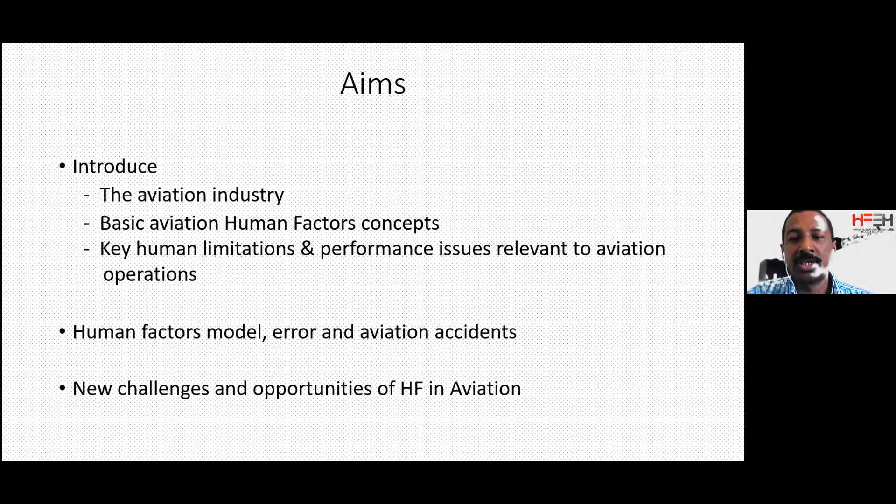This is the way I organize the talk: a little bit of history, what the aviation system is, introducing the aviation system in Malaysia, the rules and regulations. Then I'll look at human factors itself, the human model and error, and finally I'll end with some trends in human factors, challenges, and opportunities available, and finally some Q&A if you guys have questions.

First of all, we always have this confusion - what is aerospace and what is aeronautical? These two terms are used interchangeably.

Initially it was aerospace aeronautics, but now more universities like to use the word aerospace - one reason is that it sounds more glamorous. Technically, if you look at the chart, anything up to about 10 kilometers is where the air is denser, and we can fly normal aircraft using normal jet engines, which need air. But above that, the air becomes less dense, and you cannot use the same propulsion system - it becomes aerospace because you're venturing into space, like rockets and satellites. You need a different type of combustion and thrust system to bring the aircraft up. That's the main difference, other than the temperature changes and density and all that.

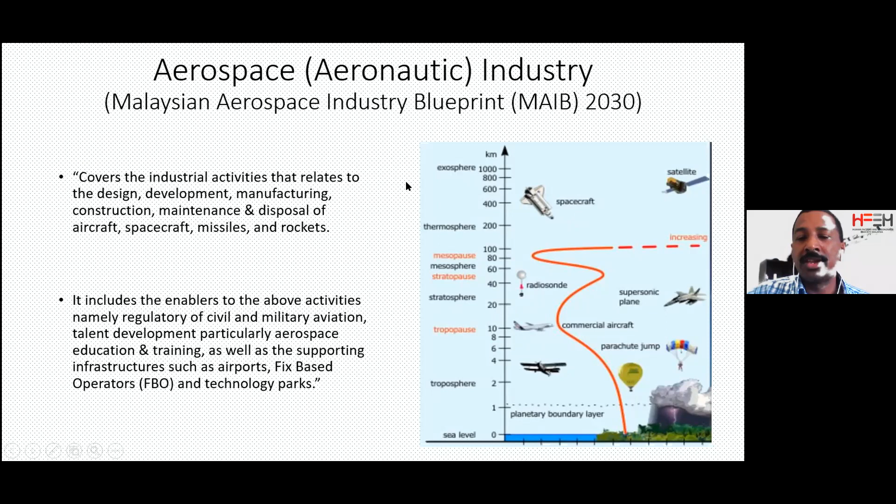A bit on the history of aviation - when people wanted to fly, obviously they looked at birds and tried to follow them. Like these guys, the Greeks and Romans, they tried to fly, but most of them eventually ended up dying, crashing, and dead.

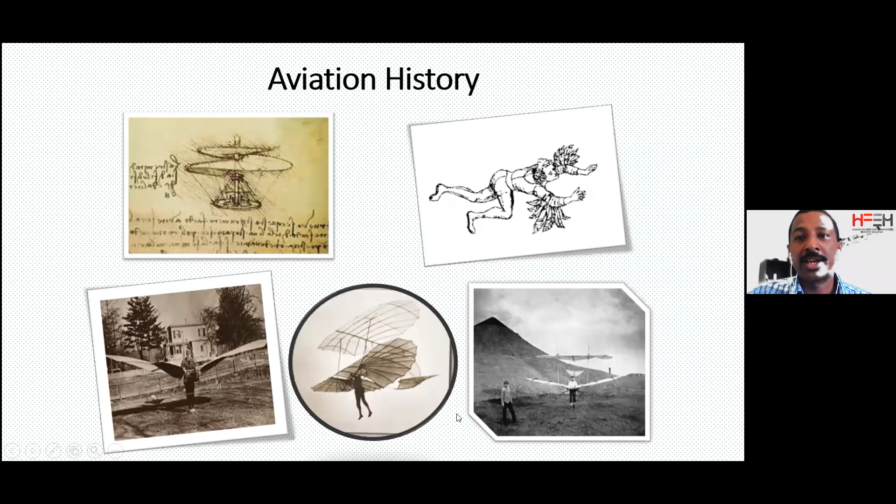So they come up with gliders and all sorts of things. One day, after a lot of trials, these two gentlemen, the Wright brothers, who actually had a bicycle shop, came out with a design and tried out this model, and finally they managed to fly, because they managed to fix a motor behind it with the propeller.

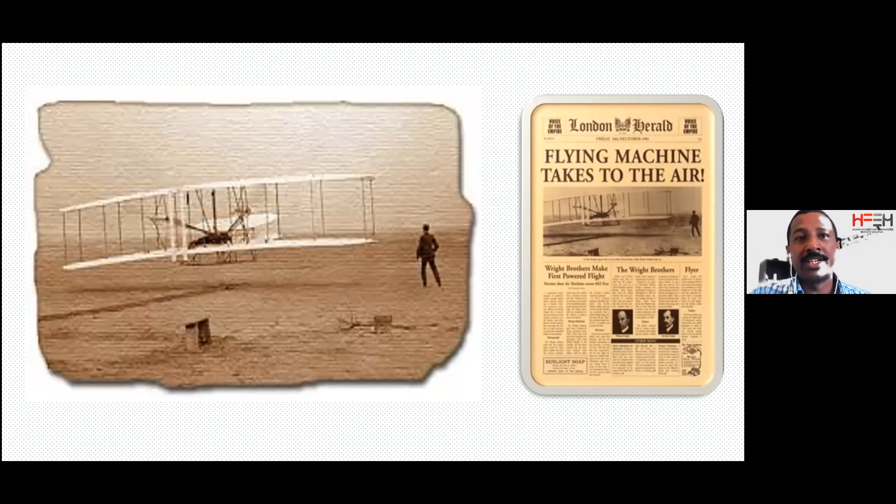So finally in December 1903, they launched the first flight, powered flight. It's called the powered flight. Before that, they were flying machines, but those were all like gliders and that sort. This one was the first powered flight.

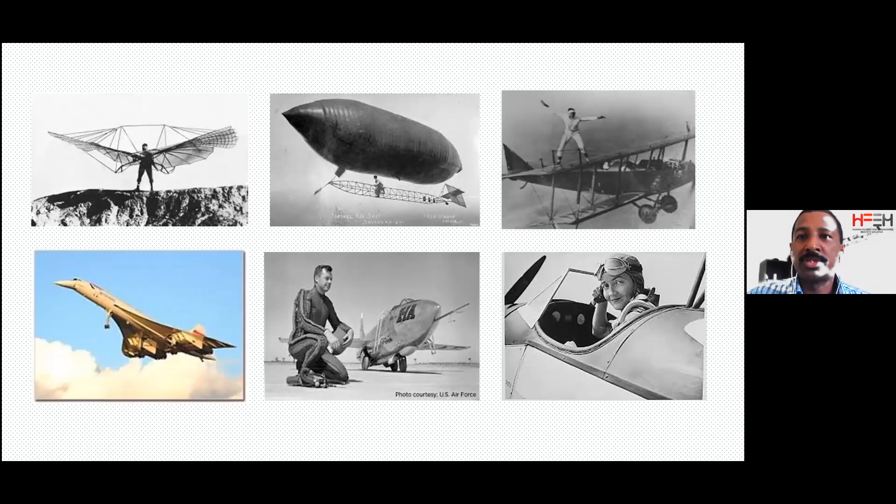From there on, aviation took off. They came out with balloons, and aircraft that can fly faster than the speed of sound. Then women start to get involved, and then you have this famous Concorde, which can fly between New York and London within 3 hours or so. So aviation progressed very fast.

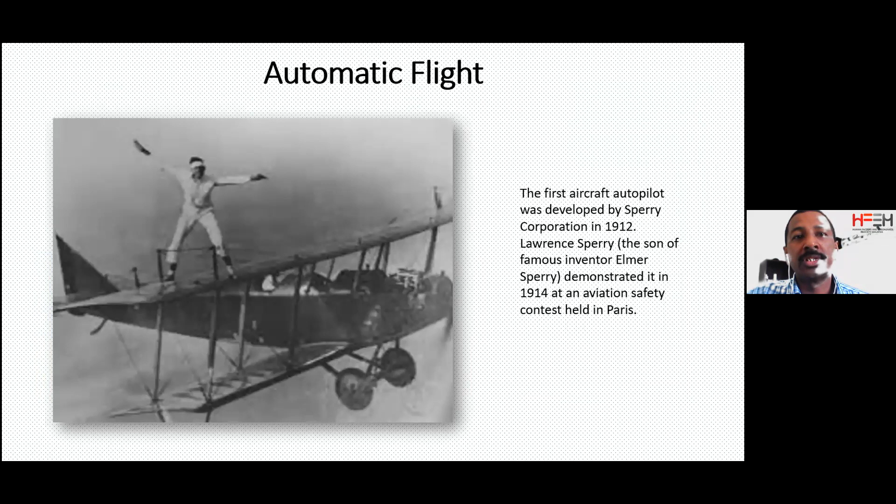They also started to design autopilots. This guy is trying to demonstrate that the aircraft is flying on its own. He climbs out, trying to demonstrate the new system. From there on, aviation took off even faster.

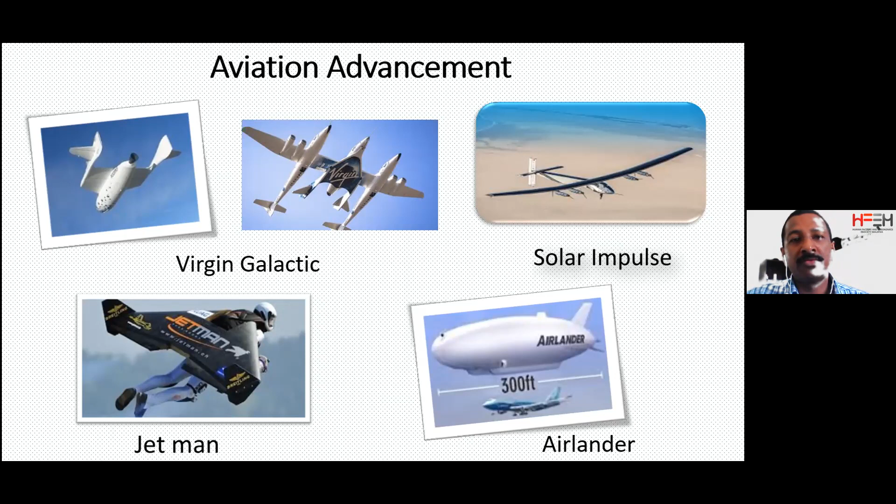For example, this is the one on the bottom left - he flies in Dubai alongside an A380. We have very advanced drones now, fighter jets, and also spacecraft.

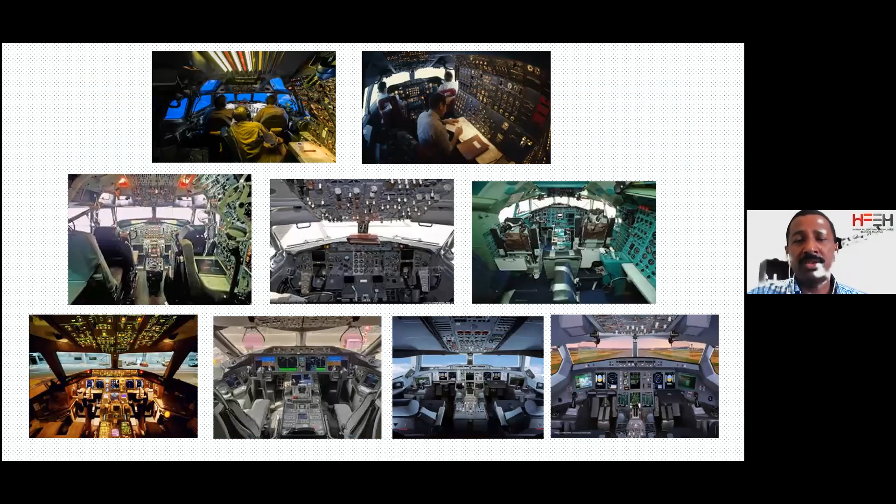So eventually in aviation, for example in the cockpit itself, the design of the cockpit went from 4-5 people in the cockpit, it starts to reduce, and then all this bottom row is all the advanced aircraft - 777, 787, 380, and then 350. So aviation has advanced a lot.

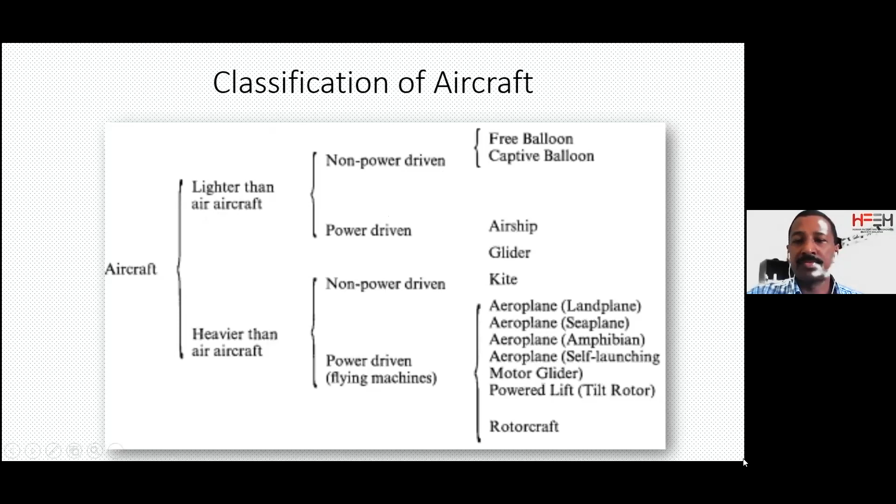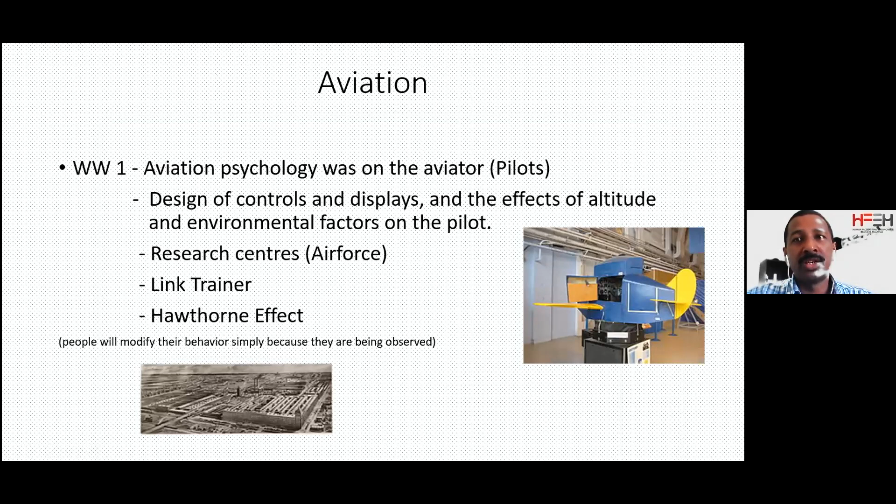Some of the earlier mistakes, the human factors - how it started was basically from psychology. A lot of this research was done during World War II, because they realized that even with the best trained pilots, accidents were still happening. So they started to study why these things happen.

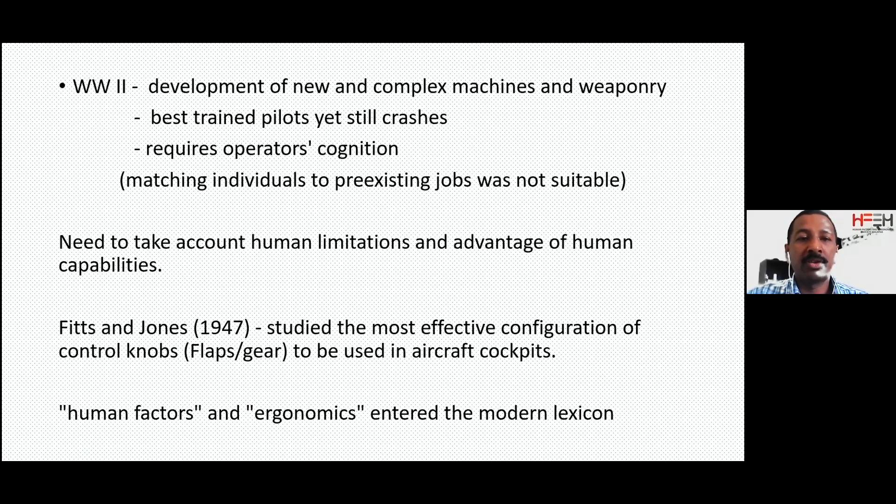One of the earliest studies was done by two gentlemen, Fitts and Jones, in 1947, on how to configure the knobs, the flaps and the gear in the aircraft cockpit. That's when the new term human factors and ergonomics started coming up.

Another example will be this helicopter - in Malaysia we call it Nuri. It's a Sikorsky aircraft that also crashed, because of the way the controls or the warning system were designed, the pilots could not see the location of the warning system. When it shows red, they don't realize there's a warning coming, so they continue and then they crash.

This is what I said about flap and gear design. When you're sitting in the aircraft near the wing, you can see this thing coming out when you're coming into land - that's called the flap. And then the gear is our normal landing gear.

So to avoid people making mistakes, they started to design the flap lever with a shape similar to a flap, so when you touch it, you know that you're touching the flap control. And on the gear lever, at the end of the handle, they put a shape like a gear, so when you touch it, you know it's the landing gear control. So you don't mix it up.

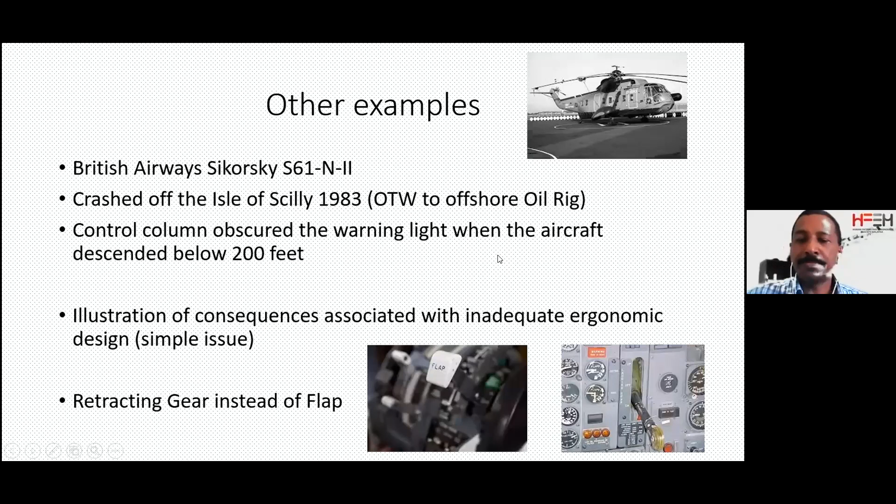Another one is this Apache aircraft - we don't have it in Malaysia, it's America and some other advanced countries. Very advanced aircraft, and the pilots use a helmet mounted head-up display. It's focused on only one eye, and they get a lot of information through that small piece of equipment. Because one eye is always focusing on that display, generally Apache pilots' eyes end up different sizes - one becomes smaller than the other. Of course, cockpit seat design is similar to a car, but the seat must be very comfortable for the pilots, so there's a lot of technology in the seat design.

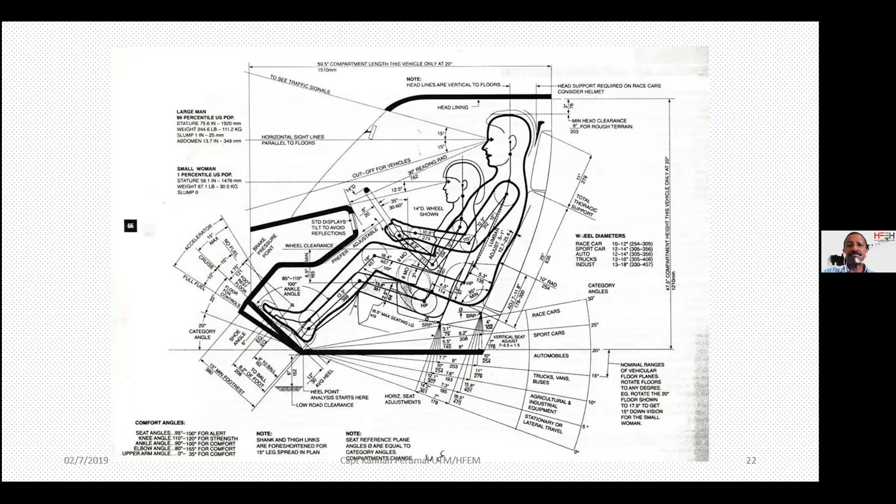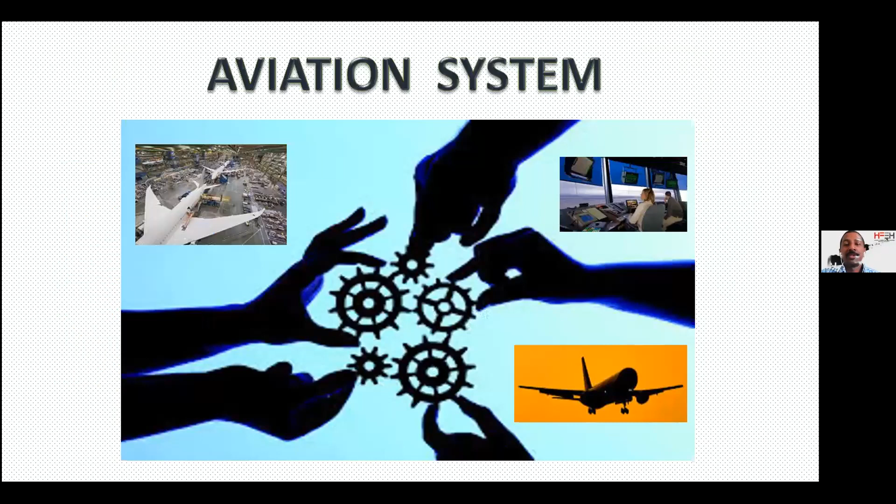Now the second part - I'm going to talk about the aviation system itself in Malaysia. Basically it consists of three main elements. One is the transportation system, the airlines and the industry itself. Then you have the customer - without customers, you don't need the industry. And then, of course, all these are regulated by the regulatory body, which in Malaysia is called the Civil Aviation Authority of Malaysia, CAAM.

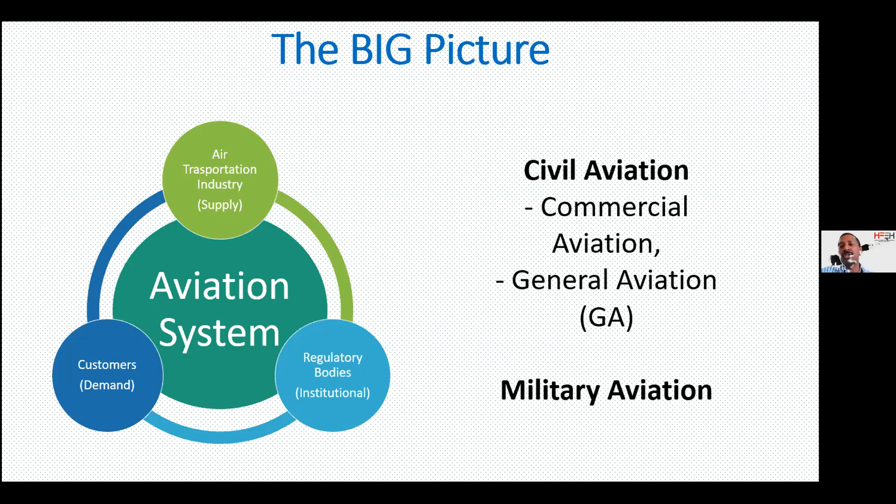Aviation can be divided into two: civil and military. Today we just talk about civil aviation. We have commercial aviation, and we also have general aviation. General aviation covers flying schools, small aircraft, business jets, and all that.

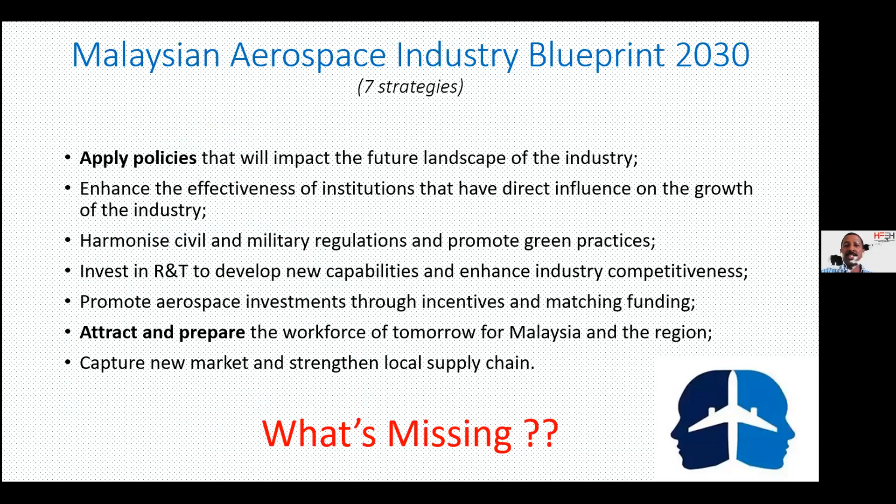In Malaysia, they came out with this aerospace blueprint with 7 strategies to increase the aviation industry in Malaysia, to attract, prepare, and all that. But there's something I realized that is missing in this blueprint - we'll talk about it in a while.

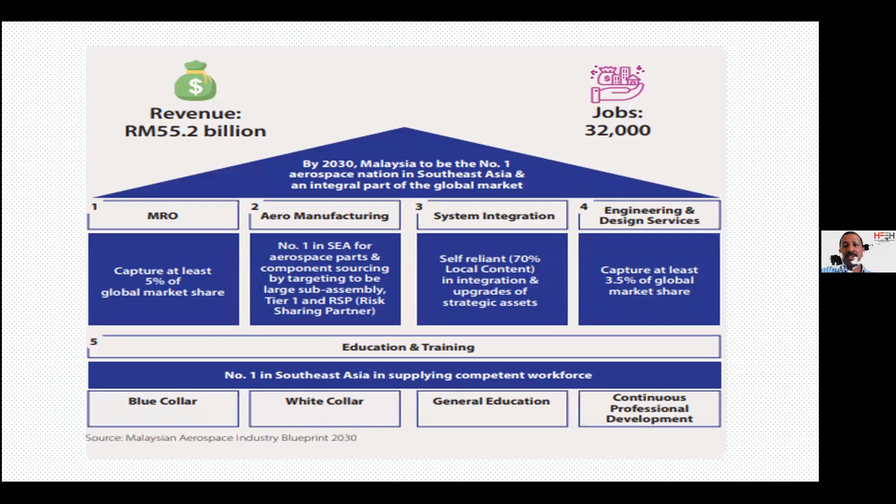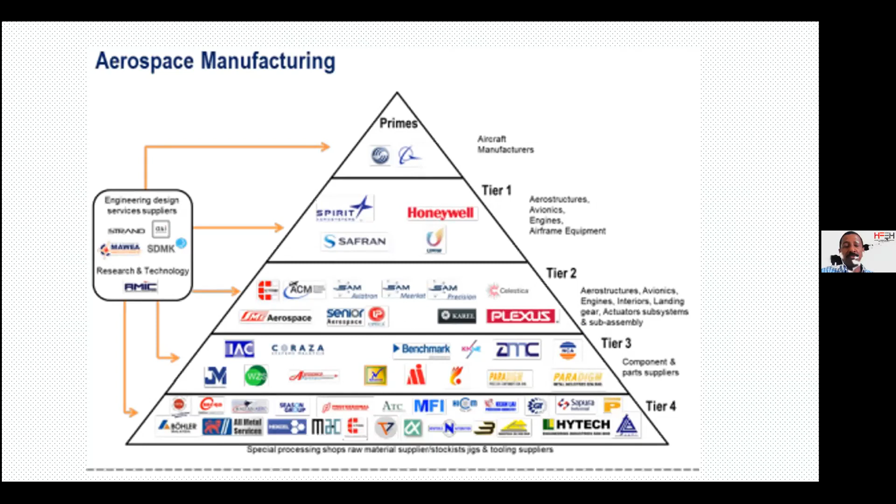So this blueprint covers how to increase jobs and revenue, divided into different parts. There's the aviation industry in Malaysia - first tier suppliers, big companies like Spirit AeroSystems, Honeywell, Safran, all the way down to Tier 4, which supplies small components in aviation manufacturing. We also have a few operators in Malaysia, like Malaysia Airlines, AirAsia, Firefly, MASwings, Malindo, plus smaller ones including the Air Force and Pos. The new company will be SKS Airways, supposed to start, but I think because of COVID, they delayed.

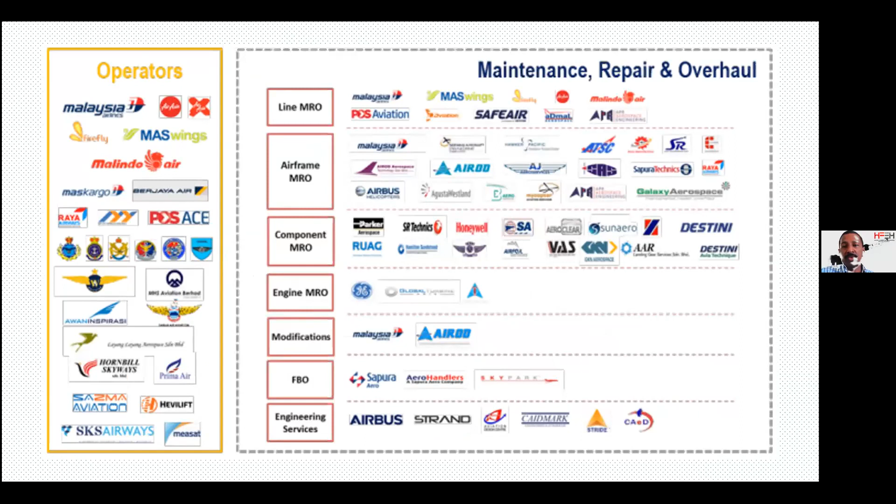And in many places in Malaysia, we have aircraft and aviation-related industries, manufacturing, flying schools, and all that. Obviously universities are involved too - all the academic institutions for training and education.

But again, as I said, something is missing - they only talk about the technical stuff. The human factor side, the economic side, nobody seems to be looking into that. So there's a gap there, and hopefully our group can do some work for them. In fact, this is one of the reasons we're having this talk, to open up the idea that there are opportunities inside this industry.

This industry is generally a very, very highly regulated industry. Everything you want to do needs approval, and it is controlled by the main body called the International Civil Aviation Organization, ICAO, which is the biggest regulator. It's supported by IATA, the International Air Transport Association, mainly for airline passenger services and all that.

In Malaysia, ICAO's role on a smaller scale is taken by the Civil Aviation Authority of Malaysia, CAAM. IATA, which takes care of passengers, lost baggage, and delayed flights - if you want to complain, you go to the Malaysian Aviation Commission.

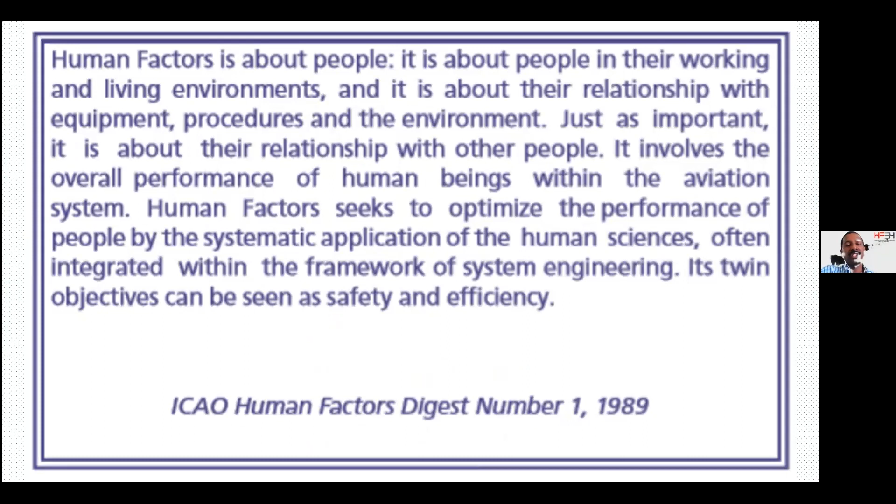So then again, what is human factors? ICAO has defined human factors as being about people, working with environment, and the relationship between equipment and environment. And it involves human. Right? The twin objective is safety and efficiency. That's end of the day, we do all this mainly because of safety. So in summary, we can say it's basically to reduce human error, increase productivity, enhance safety and comfort, with specific focus on interaction between human and other things of interest.

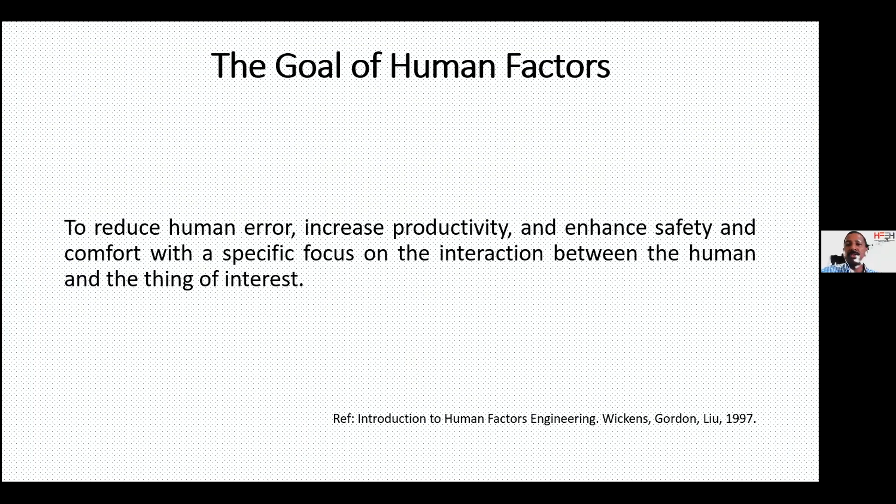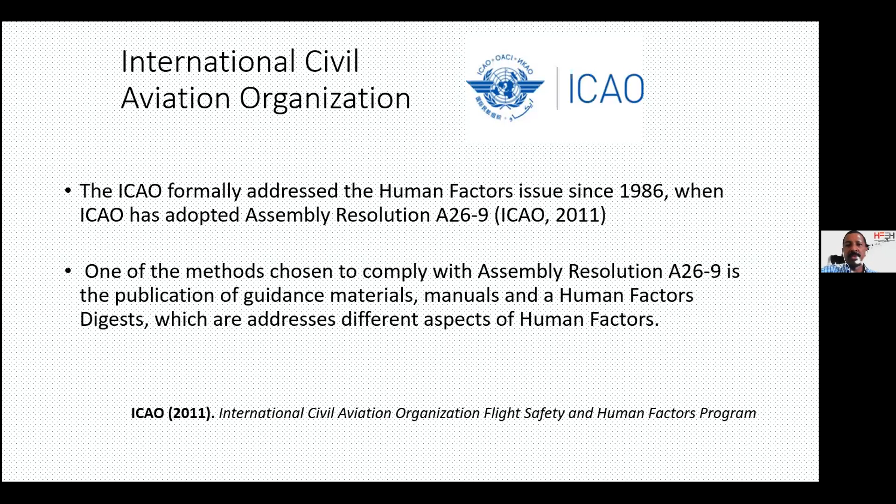ICAO has their own manuals. Through assemblies and meetings, they come out with different manuals. For example, they have human factors guideline for aircraft maintenance, management, organizations, and all that. There's also other human factors related documents. If you want to go about aviation, we can find about 16 documents. Probably now there's a bit more.

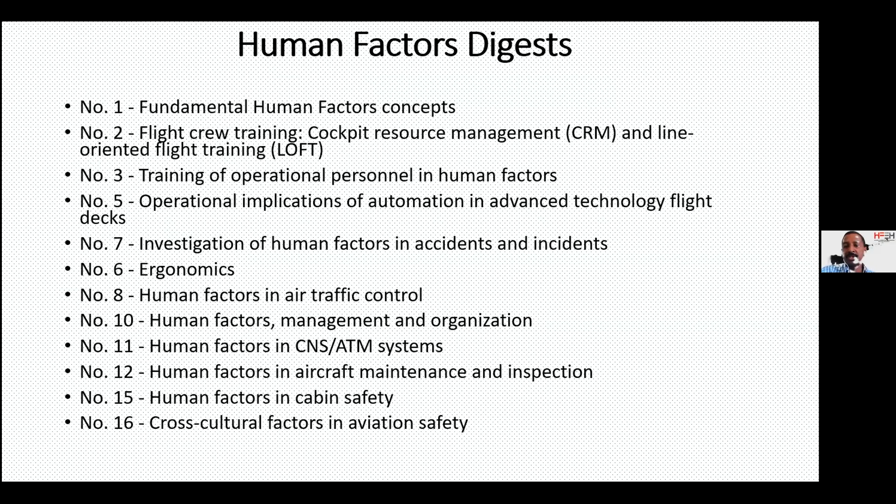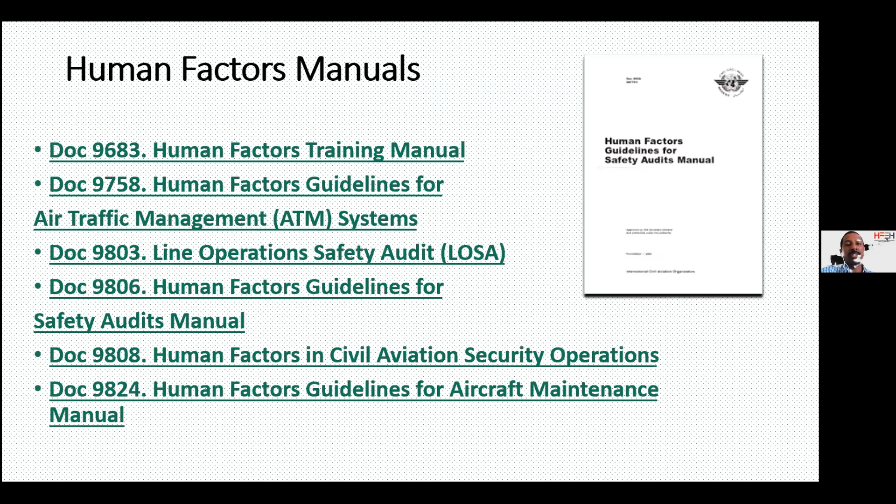They talk about air traffic control, maintenance, cabin safety, even culture, automation, crew resource management, and all the different documents. Some more manuals, documents, human factors training manual, and all that. Those interested can go and find these documents to gain more knowledge on this.

In Europe, they have another document called the CAP 719, Fundamentals of Human Factors Concepts. And as I said, IATA also becoming like ICAO and trying to do some business with this. They also run human factors courses. In fact, now online you can do all these courses in this process.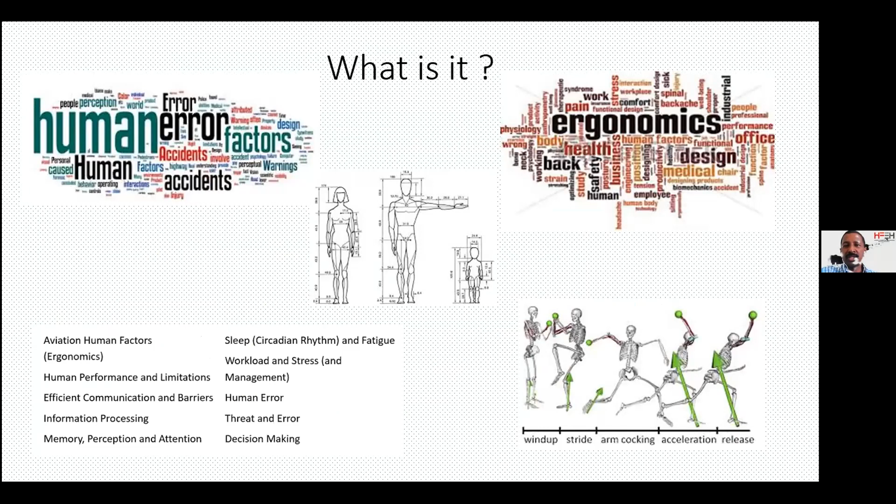When you talk about human factors, sometimes we mix it up with ergonomics. These two are always closely related. The topics we always look at are information processing, sleep, threat and error, decision making, and all that. One is static measurement, and we also look at dynamics. Again, concepts, communication, stress, workload. This is similar to other industries, but in aviation, we look at it in a bit more detail.

Under the ICAO, or in fact under the CAAM, we have a lot of other regulations or acts, the Civil Aviation Act, aircraft offences and all that. Although these are not directly involved with human factors, this is just for your knowledge. As I said, it's a highly regulated industry.

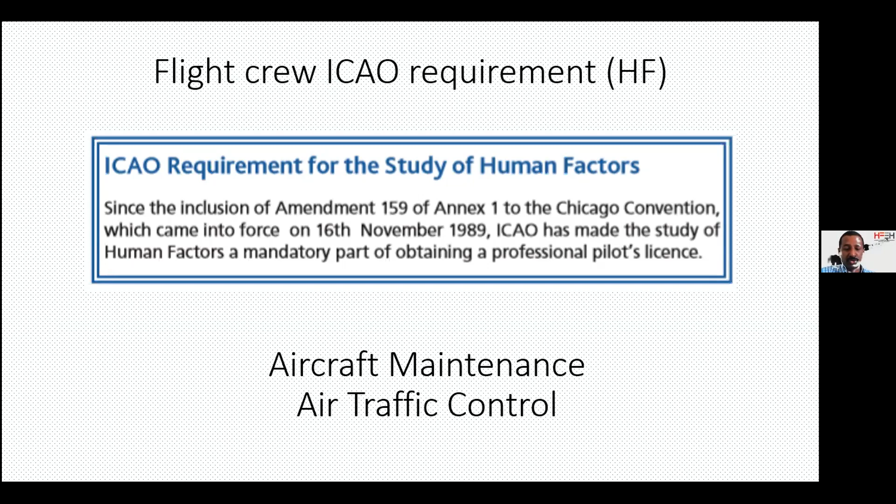One of the requirements is for pilots, for example, it's a requirement for us to pass human factors courses. We must pass it as part of our license. Similar to the maintenance engineers, aircraft maintenance engineers, we call them licensed aircraft maintenance engineers. They also need to take many subjects to pass it, and module 9 is one of the human factors modules. Similarly, the air traffic controllers must also pass this human factors module.

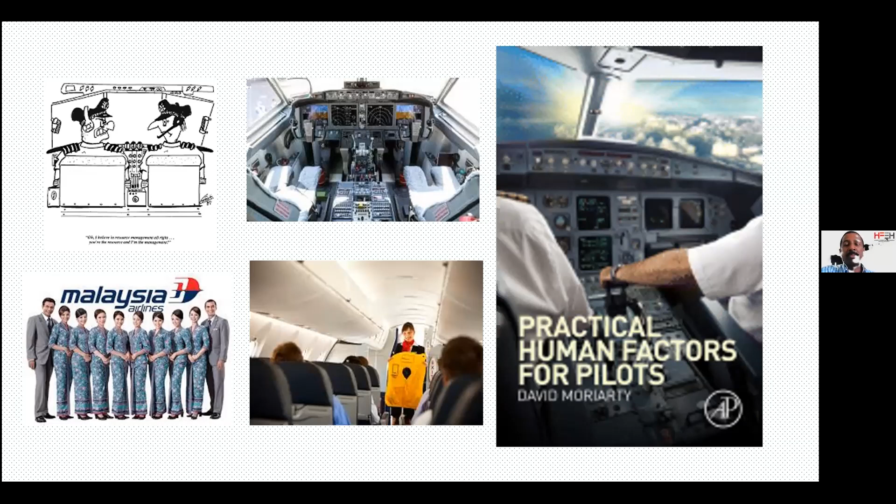As I said, there are mainly three segments in aviation. If you look at it, there are many more, but I will just talk about the three. One is flight operations, pilots, cabin crews, and then how they interact in the cockpit, how they work with the modern cockpit, a lot of technology. And in fact also the cabin crew, when they are dealing with the passengers, there's a lot of human factors involved even behind the scenes.

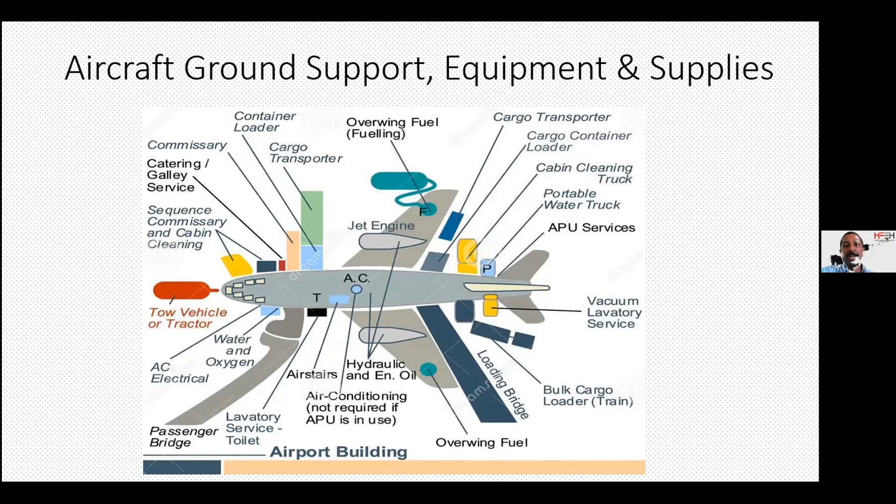This is another thing. When the aircraft is parked, you can look through the window next time you're at the airport. When the aircraft is parked, there's many equipments around it, so there's a lot of human factors involved. There are a lot of accidents that happen. This tow truck went and hit the aircraft. When they're supplying the catering, some accidents happen. When refueling the aircraft, sometimes there's a fuel spill. How do the safety procedures we need to follow work? There's a lot of things happening around the aircraft.

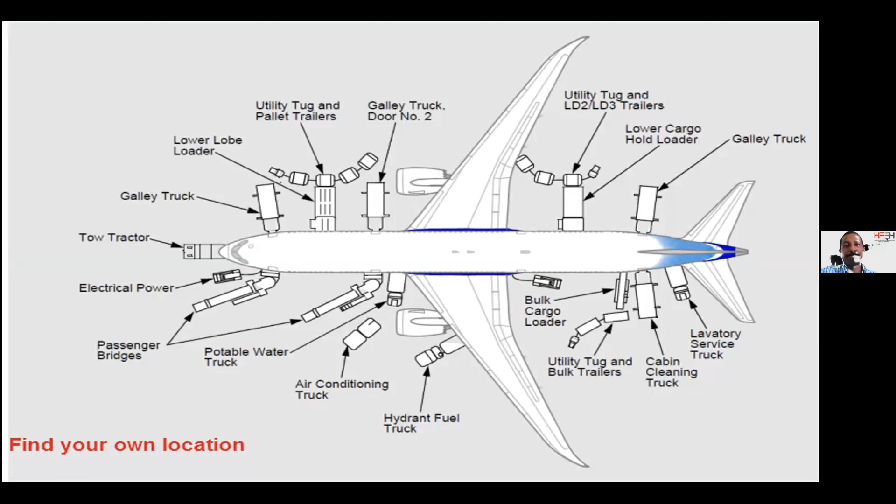How they load the cargo, and sometimes when they try to fix the aero bridge to the aircraft doors, there's also some accidents that happen. Sometimes the aircraft, when it's coming in to park, also hits the aero bridge. So there's a lot of human error mistakes that happen, and these are mainly human related errors.

Next one is aircraft maintenance. If you get an opportunity, maybe the human factors group can organize a trip to the aircraft hangars, the Malaysian airline hangars. Either we can go to Subang or KLIA, see how these aircrafts are maintained. These hangars work 24 hours, with different light conditions, daytime and night time.

There's a lot of accidents that happen. Generally, this accident happens early morning because of not enough sleep. People die in the hangar because they have been crushed by the flaps. When they're doing some tests, something falls down.

The aircraft wing here, they're doing the inspection of the wing. Also, some errors happen marshalling the aircraft. So aircraft maintenance also involves a lot of human factors issues.

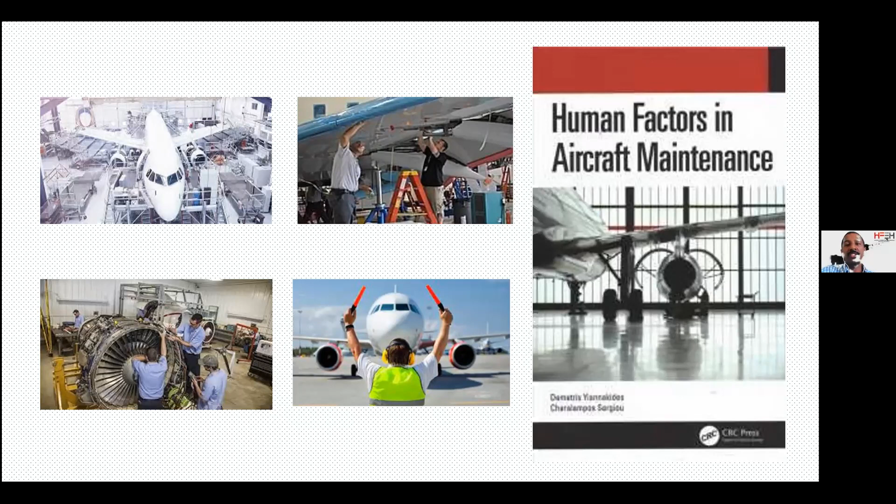As I said just now, the next segment will be air traffic control. This is another area that many people don't know about, which is very important in the aviation industry. These are the people who control the aircraft. They sit in the control tower, that's what most of us think, but they also sit in the air traffic control rooms.

Like in KLIA, we can also organize a trip. Of course, now we can't do it because of COVID. But this is how the working environment is - very, very busy. They're controlling a lot of aircrafts.

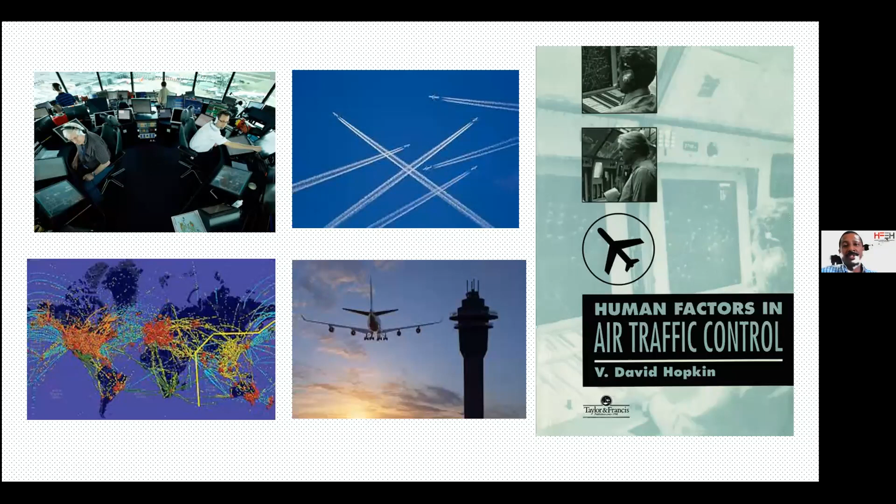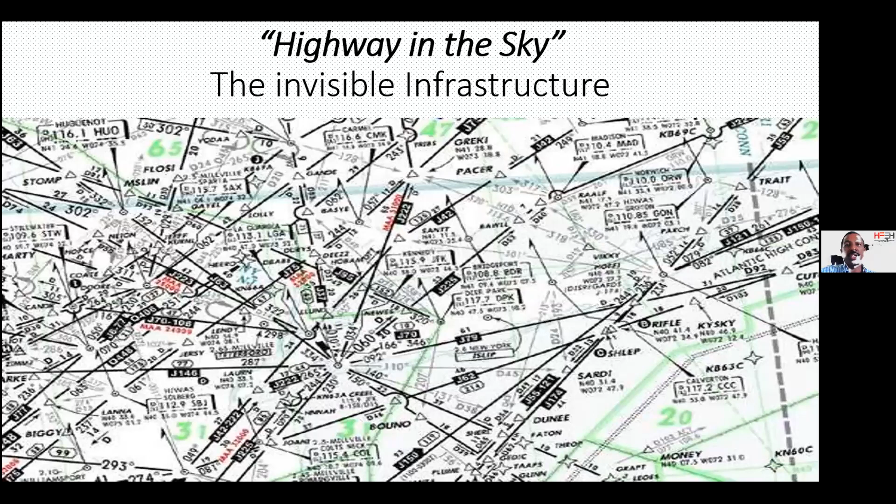This is the air traffic system. We have sort of a highway in the sky. Over Malaysia we also have a lot of highways in the sky, and these are the air traffic controllers. We need to control this aircraft's movement in the sky.

This is what from the movies we think how they have the display, but now the displays, the screens that the air traffic controller use have changed, very advanced screens, so they need to work looking at the screens and talking to the pilots. This is how a typical control center looks like.

We can also organize a trip to our control center, which is located in Subang. They control all the aircraft flying over Peninsula Malaysia. They have another center in Kota Kinabalu and another one in Kuching.

Very interesting - a lot of ATC related errors, procedure non-compliance. So all these are human factors related errors.

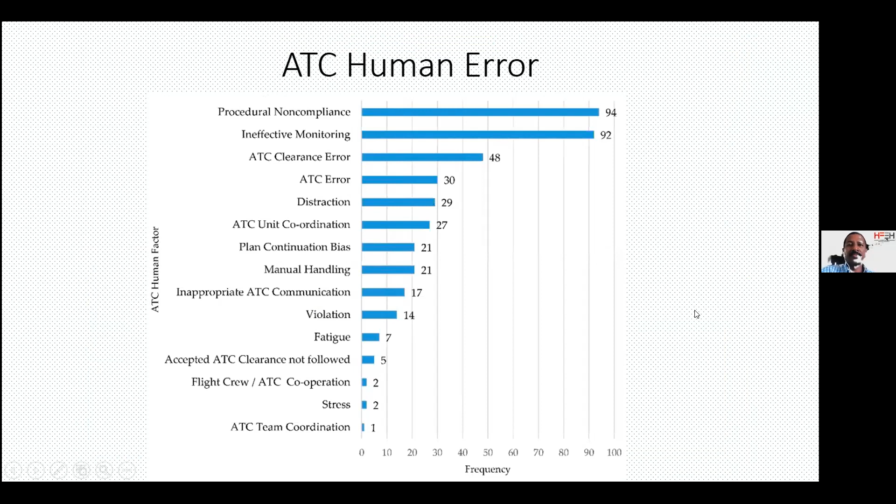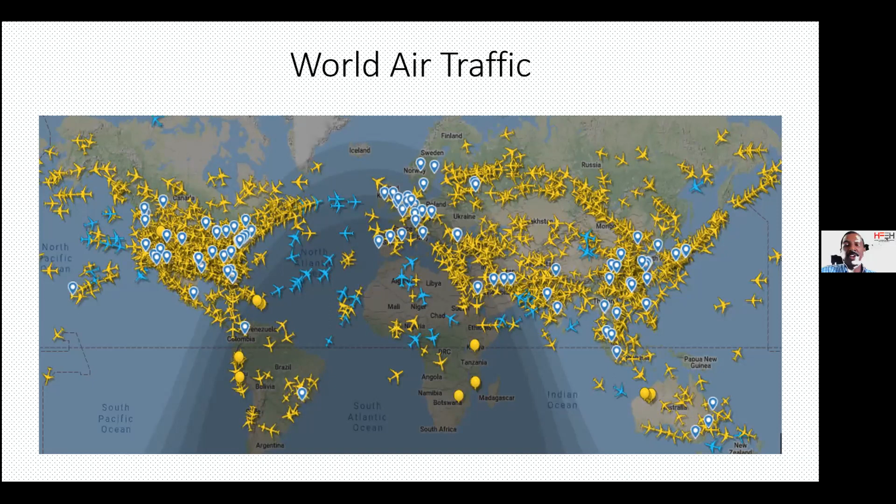On a typical day, this is the screenshot - it's an old screenshot before COVID. If you see the number of aircraft flying daily, you can log on to this website called Flight Radar 24, and you can see the number of aircraft which is flying. Imagine that each of these aircraft is carrying about 100, 200, 300 passengers, and if there's any error or accident because of human factors, there can be a lot of deaths. So that's why human factors is a very important area that we need to concentrate on.

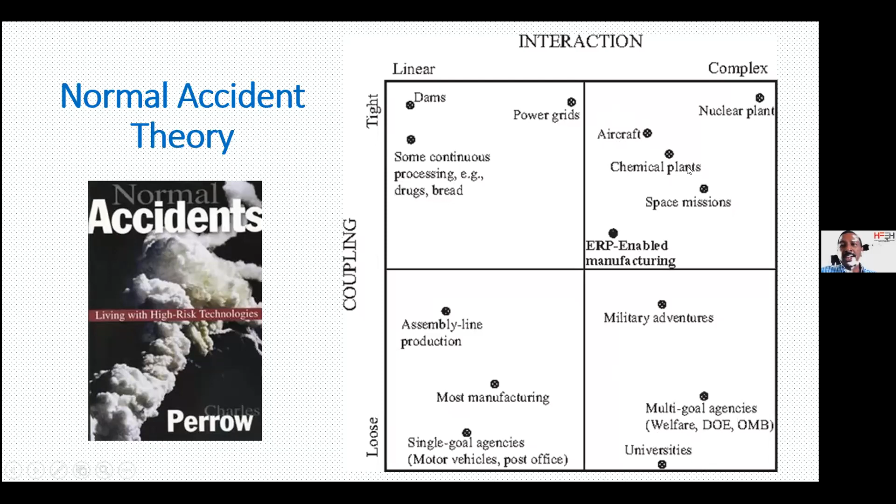One professor, Professor Perrow, came up with this theory called normal accident theory, and he linked it with how the systems are coupled, whether it's loosely coupled or tightly coupled, and then the complexity of the system. So if you look at the top right quadrant, aircraft - which means actually aviation industry - is a very tightly coupled industry and very complex industry. So there's a high chance of accidents happening.

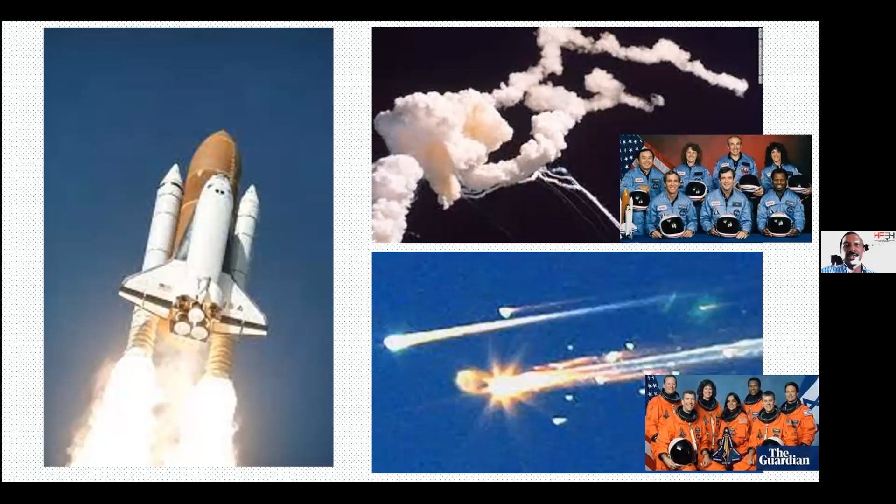In space, we had two big accidents mainly because of technical issues - the Challenger and another spacecraft which crashed coming in. There are also some other major accidents that happened - I showed the Columbia and Challenger disasters. Tenerife, number two, we'll watch a video later on - two 747 aircraft which crashed. This is a big crash, 500 over people died in this crash a few years ago.

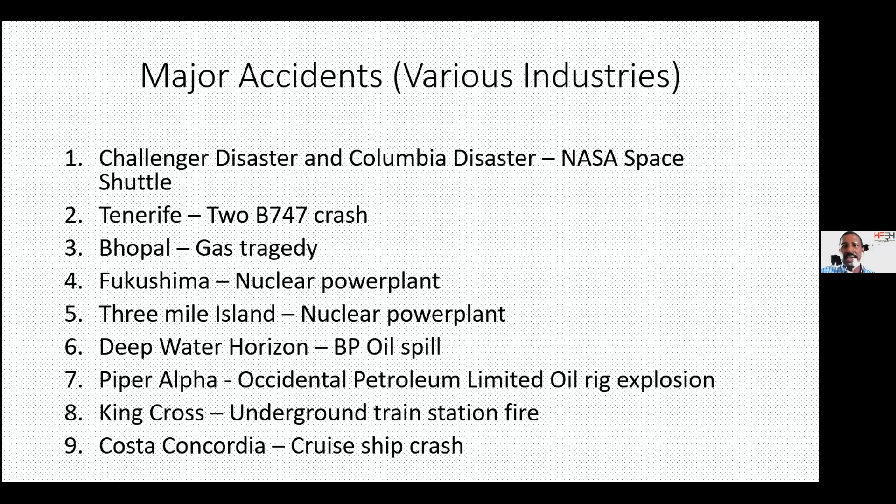Once you're airborne, it's basically quite safe. But on takeoff and landing, these are the two portions that are very dangerous sections. Mainly because of human factors again - coming into land, the pilots are tired, the weather can be bad, we don't have enough altitude to recover. So that's the main reason these accidents mainly happen during landing.

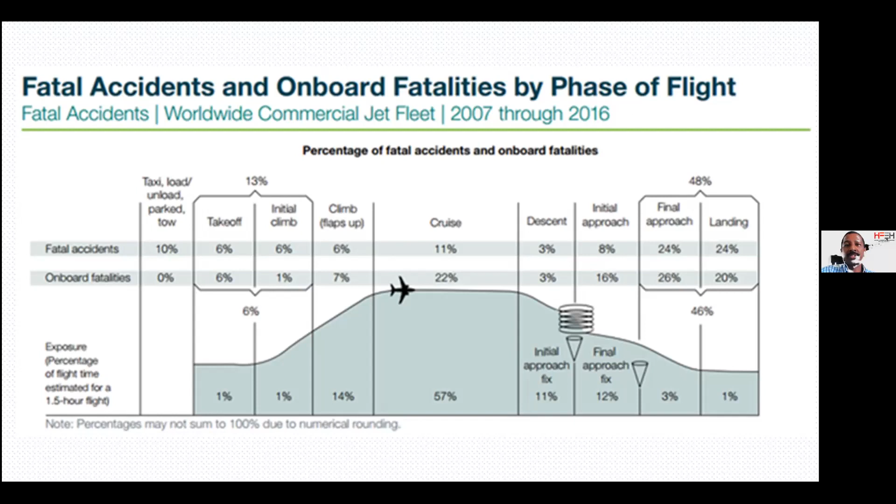So again, if you look at human factors - the pilot's mental state or workload - during landing, your capability is low and the demand is very high, so the tolerance is very low. So there's a high chance of accidents happening during that period.

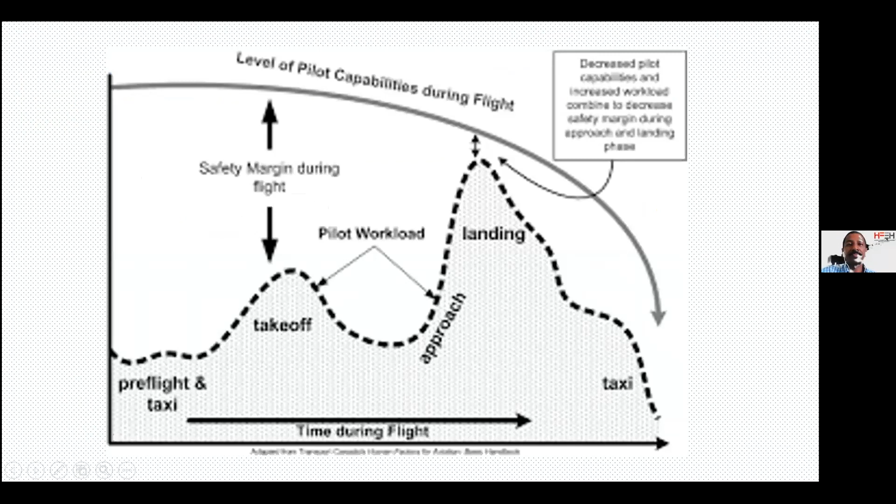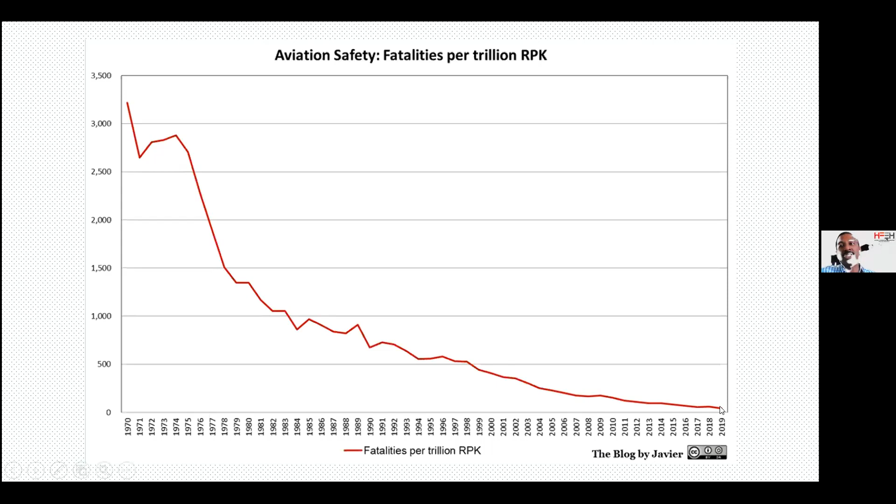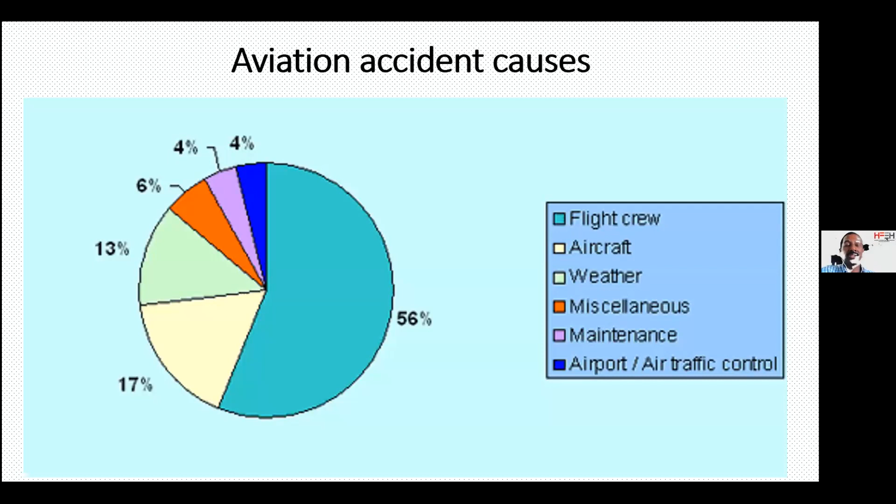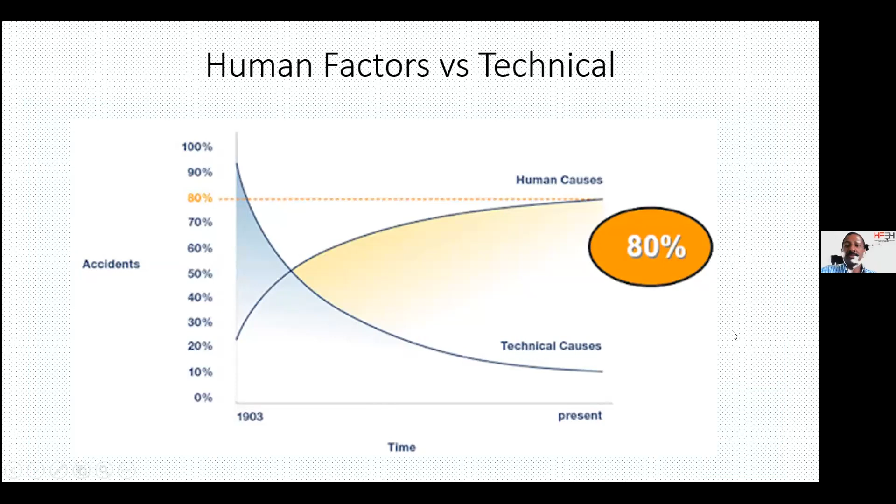As I said just now, technical issues have reduced tremendously, but the human cause is always there. When an accident happens, it has two main effects: the airline loses a lot of business because people are scared to take that airline, and it damages the reputation.

So the key word in aviation is safety. All these human factors, efficiency and all that, we do because we want to improve safety. And human error is the main cause, we can say main reason, why all these accidents happen, when you look at human factors.

So this guy came out with what's called the dirty dozen, 12 reasons that we make mistakes: distraction, lack of resources, stress, lack of teamwork, fatigue, lack of knowledge. All these are involved in human factors. We can talk about this separately in some other section.

Of course, to err is human. Humans always make mistakes, and we need to understand why humans make mistakes, and that becomes a science and part of the factors process.

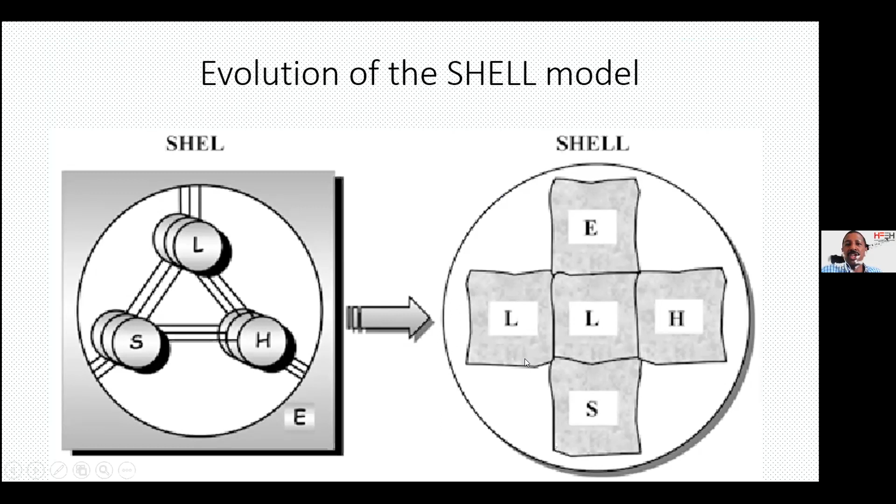Some of the models that are always used when you talk about aviation—I'm not sure about other industries—this is one of the models that is quite famous. It's called the SHEL model: how human, which is in the middle, interacts with hardware, software, procedures, environment and all that. Eventually they found out that we also need to look at how human interacts with another human. So that's where the SHELL model comes in, liveware and liveware.

So this is one of the accidents I mentioned just now. We will watch a short video, about 3 minutes, of this accident. That's where human factors become more important.

Sunjet 282, proceed directly to runway, backtrack and hold. Los Rodeos Airport on the Spanish island of Tenerife is busier than it's ever been. BA 783, hold short of the runway and stand by for taxi clearance. With so many planes parked in the taxiways, the controllers instruct departing flights to taxi along the airport's only runway to get into position for takeoff.

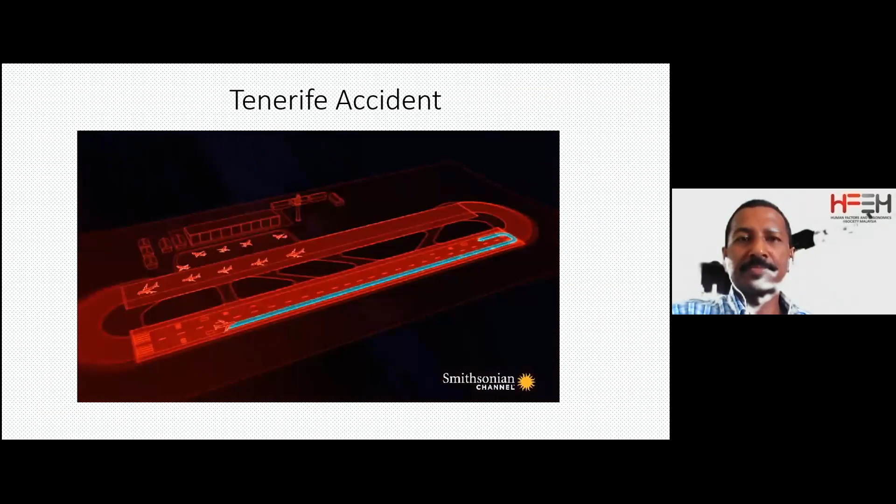One of the planes waiting to get to Las Palmas is Pan Am Flight 1736. The Pan Am crew is ready to get back in the air, but they can't taxi to the runway. A KLM 747 has stopped in front of them to refuel. Tenerife KLM 4805, you finished refueling, requesting clearance for startup. He said, follow KLM down the runway, backtrack, make an exit to get around back of KLM. So that's what we were doing.

First Officer Bragg is unfamiliar with the airport. He checks a runway diagram to help find their turn. Okay, that's this one right here. Go ahead, it's going to put us on the taxiway.

As they taxi, they listen to the tower controller tell the KLM crew ahead of them what to do after departure. You are clear to the Papa Beacon, climb to and maintain flight level 90, right turn after takeoff. Roger, clear to the Papa Beacon, flight level 90, right turn out. We are now at takeoff. Okay, stand by for takeoff, I will call you. And we're still taxiing down on the runway, Clipper 1736.

Papa Alpha 1736, report runway clear. Okay, we'll report when we're clear. Thank you. The Pan Am crew will be turning off the runway in just a few more yards.

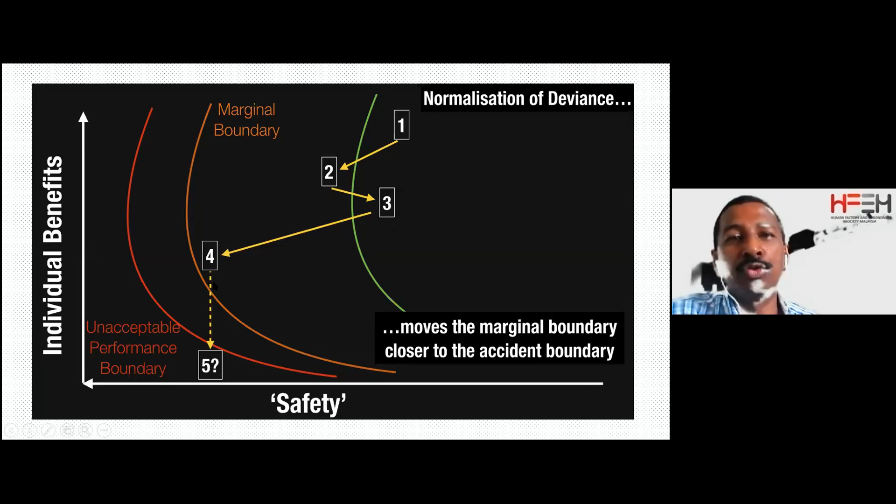There's another concept called normalization of deviance. This is what we want, but we deviate to a norm, and that becomes the new norm. That's actually an error we are making, and eventually an accident can happen.

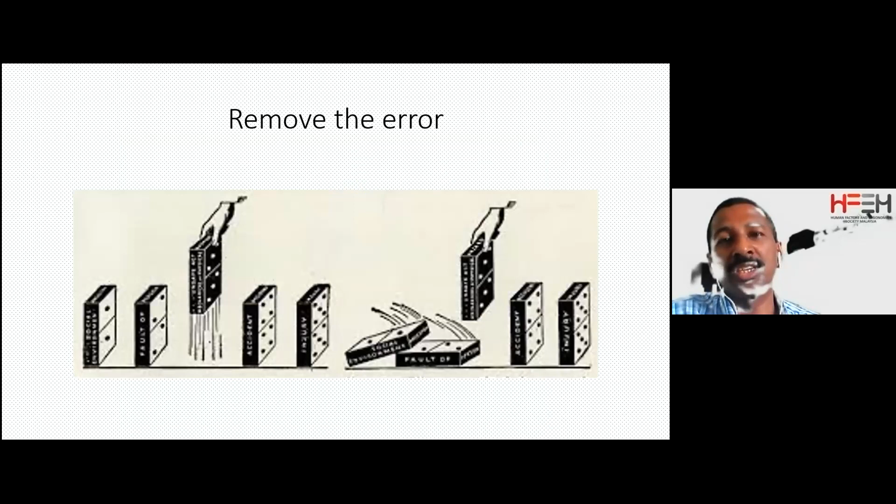When you look at accidents, the errors are all lined up like dominoes. If something happens, another thing will happen, another thing will happen - unsafe acts, social environment, all that - and finally we have an injury. So what we can do is remove the error. If we can remove one of these errors using our human factors techniques, we can avoid the accident.

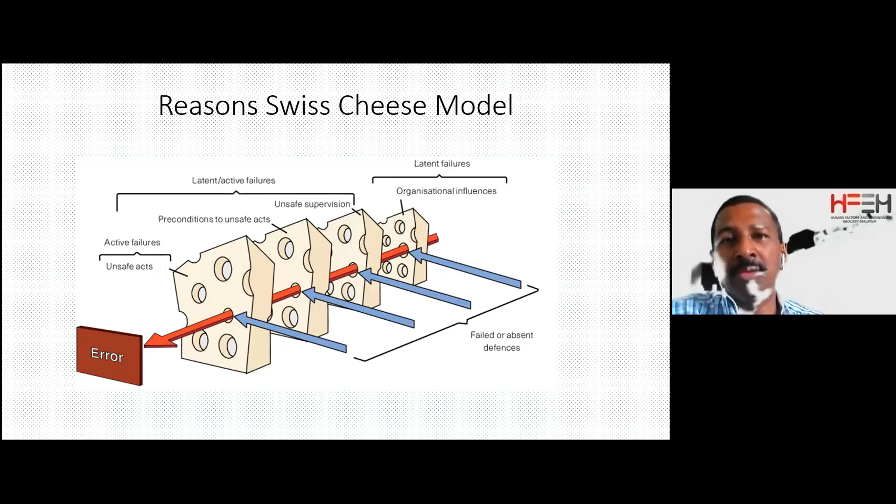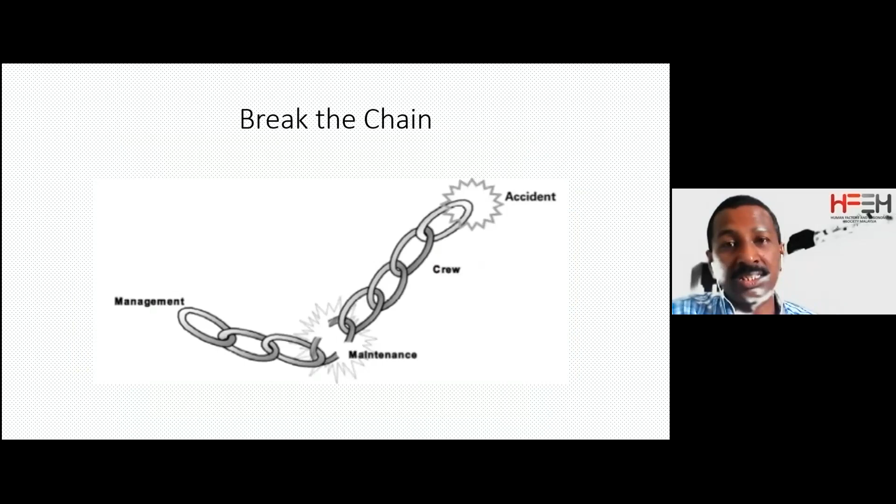Another model always used in aviation is called the Swiss cheese model. It passes through each element, and finally an accident can happen. We can combine these two with the SHELL model. At the end of the day, we try to break this chain of errors using our knowledge of human factors.

Take a pick: blame the error, or try to learn from the failure. We cannot always just blame the error. We need to admit it - we must be aware that we can make an error, and we must be able to admit it. The moment we start to hide our error, that's where it becomes more dangerous.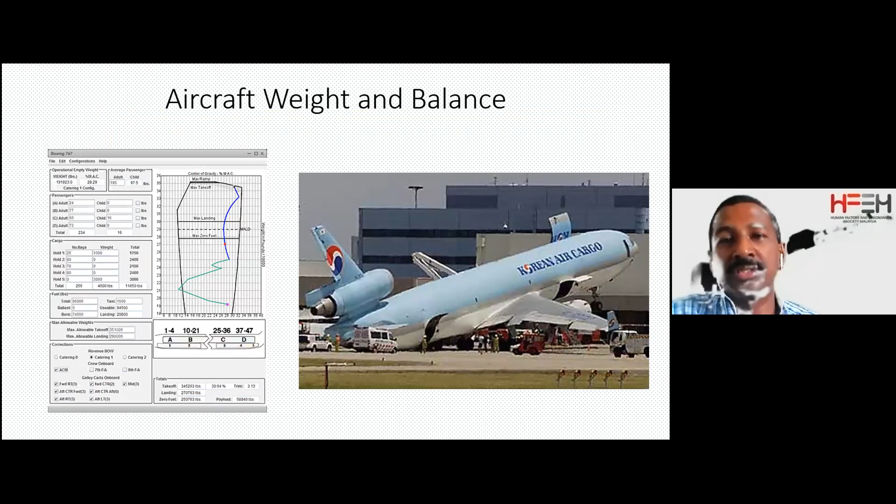So how we want to do it is think about it differently - look at the issues differently. Instead of saying human error is the cause of trouble, we want to look at it as a symptom.

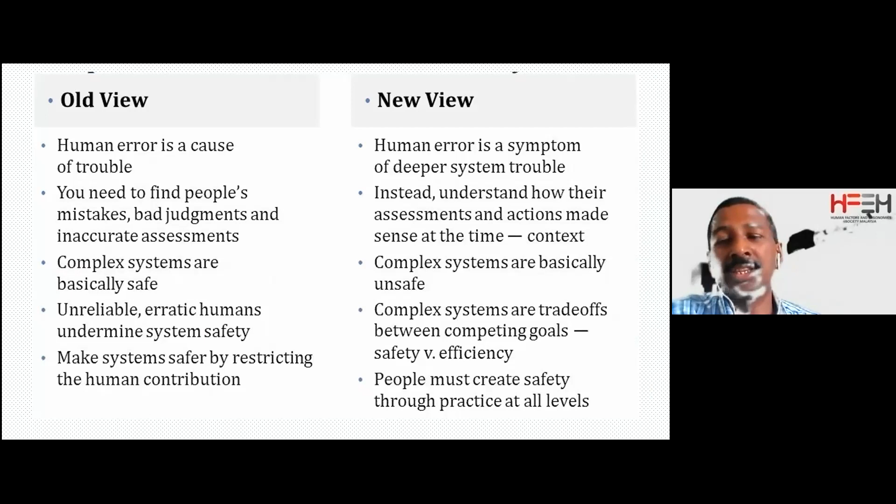When people are making errors, we want to look at the symptom. That shows that there's some problem inside there. So we need to go and look at the system, how things are designed and how people work in that place. So the new view is people matter more than anything else. Of course, we always get punished, so we're trying to avoid that. We need to accept that error is normal, and we work on that.

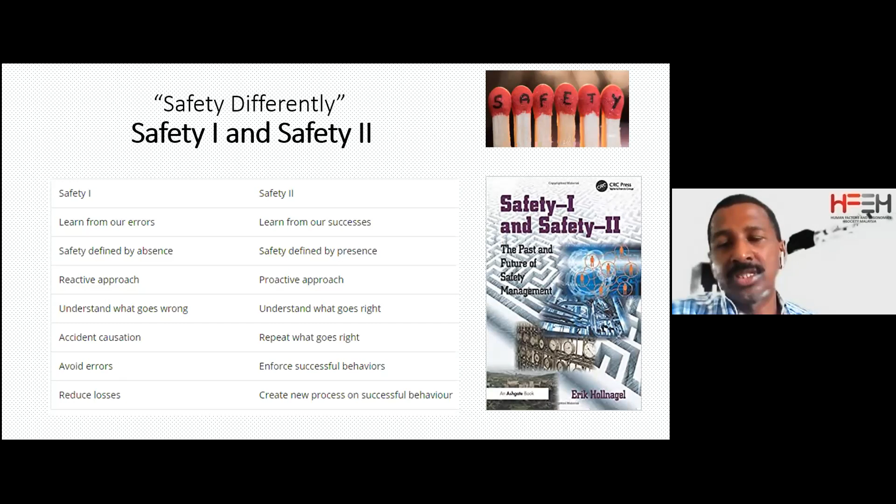Another person came up with this concept of safety 1 and safety 2, which is about learning from errors. We look at the issues that are happening, not like what we are looking at now, somebody makes a mistake, we try to find who made the mistake and then punish him. Instead, we want to find what was the reason he made a mistake. So this concept is called safety 1 and safety 2.

And of course, related to that is called resilience. We want to bounce back. We made a mistake, we try to improve the mistake. Why does a human make this error? What are the factors involved? And then we come back.

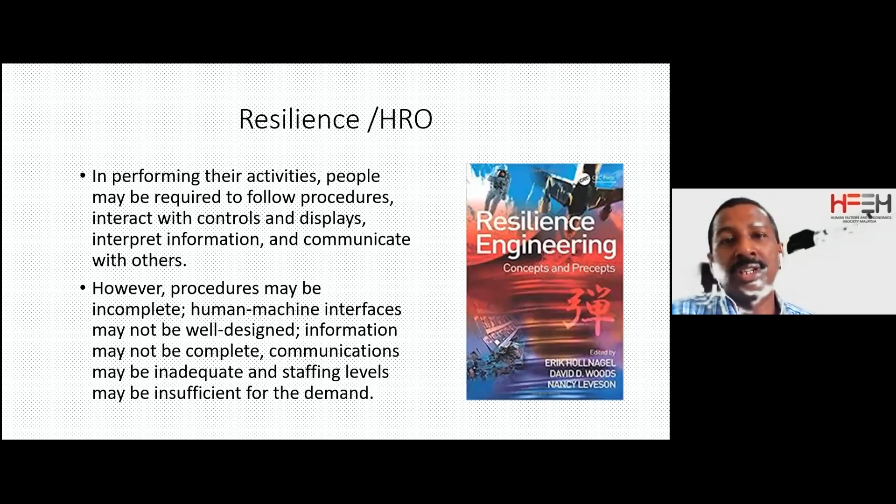So again, it comes with this concept of resilience engineering and high reliability organization. Aviation is one of the high reliability organizations. So these two are involved. Understanding human factors will help you to set organizations up to succeed. That's what we wanted to eventually come up with, human factors, and then ensure that we are safe.

So some of the challenges, the latest challenges is obviously automation. As technology gets better and better, we're coming up with AI, a lot of drones. Now people talk a lot about drones, and nobody actually looks at the human factors of drone operations. So that's one area that we can go into.

Then joint cognitive system, where human and machine are interacting. So now people are outside the aircraft. The drone is there, how do we work with them? And then now we have swarm drones, groups of drones working together. So these are all the new challenges which are coming in.

Human factors issues contribute to more aircraft accidents and incidents, as we know, because it gets together, small mistakes can get together. Human error includes flight crew, maintenance personnel, air traffic controllers, and others who have direct impact on flight safety. So what we want to find out is what's actually behind this human error. So human factors can help with that.

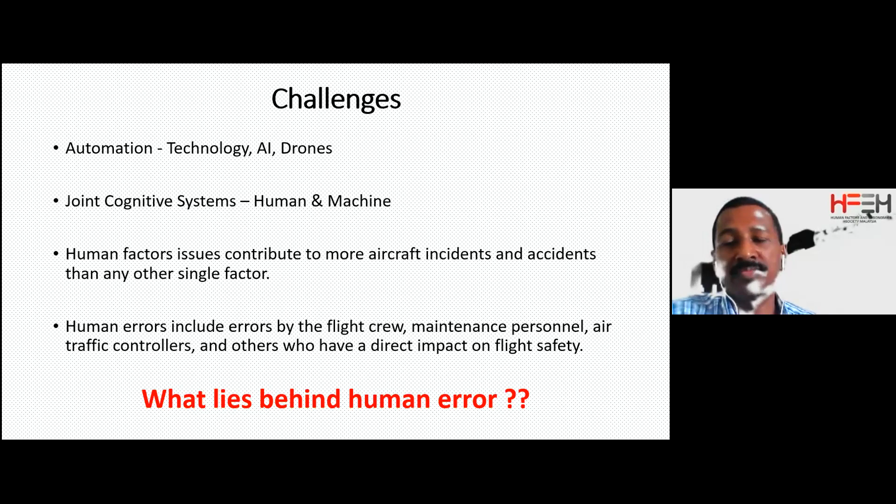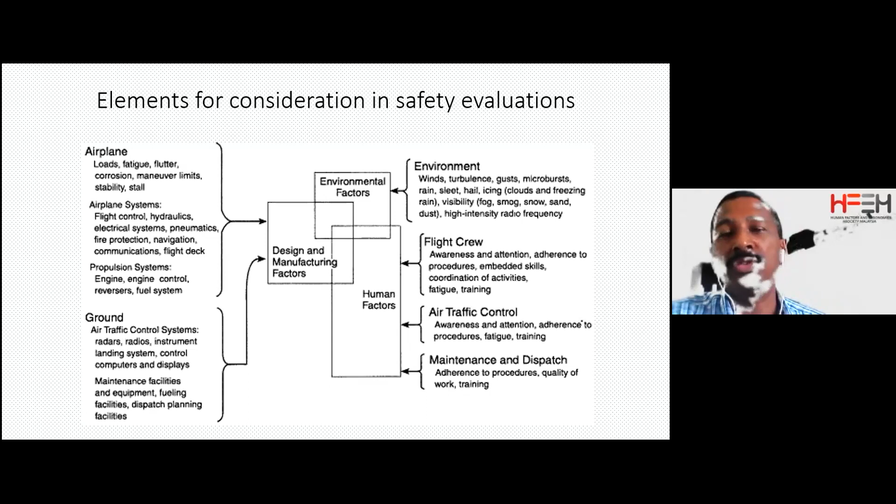Again, another person is Sidney Dekker. He has many books talking about this. We cannot just go and blame it on human error, we need to find out why it is. And when we start looking at why, then we can look at environment, air traffic, maintenance, dispatch, how these systems work together.

So how can human factors assist? First, we need to accept it, it can happen to anyone, so we need knowledge. That's where these human factors studies come in. We can improve on the design, on the procedures, and how we manage it. And as I said, it's emergent, so it's a combination of many things.

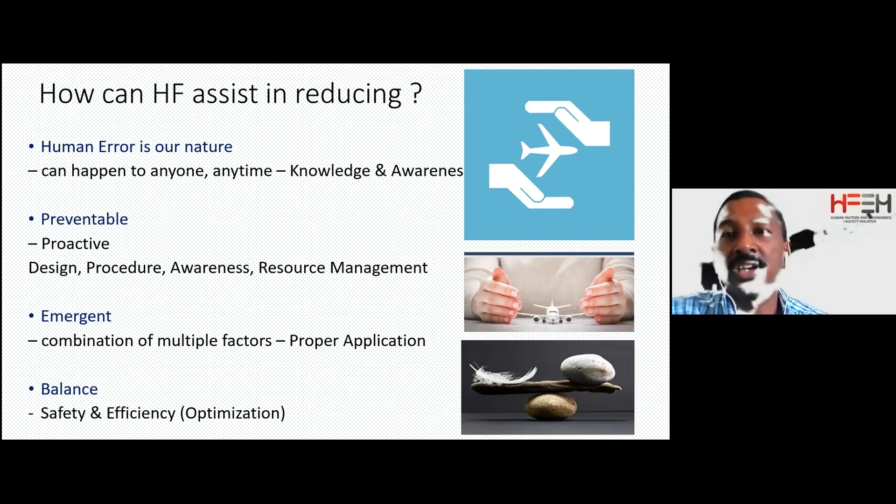When we look again at the domino effect or the Swiss cheese effect, it's actually because of a combination of many effects, multiple factors. So eventually we need to find a balance, whether we want more efficiency, more productivity, optimization, or safety, how much is safety, and human factors can play a very important part in this. And we want to use the resources properly. As I said, safe optimization, and I've been saying this from the start.

In fact, that is the main reason, one of the reasons that I want to give this talk is this is one area. Human factors is really an under-researched area in aviation in Malaysia, that's my take on that. And so there's a lot of opportunity, and our group can contribute a lot in this.

Of course, we have our own journal, and in fact, we don't have any papers inside this which are related to aviation at all. So we can start to write papers related to aviation. Hopefully our group, the human factors group, can become the humans behind the human factors, to improve the safety of our aviation industry and be at the forefront of human factors research, development, and practical application. So hopefully we get more people interested in aviation research, and I can help out.

In fact, our SIG group can help link you all with the aviation industry, and from there we can do a lot of research. There's a lot of opportunities. People ask me, but since I joined, I know people, and if you guys are also interested, please let me know. We can go to air traffic control, engineering, or operations, and we can work, because each of them has their own human factors group, but they don't really have actual researchers since they're operational people. So all these people, you guys from the universities and from the industry, can actually help do research on this stuff.